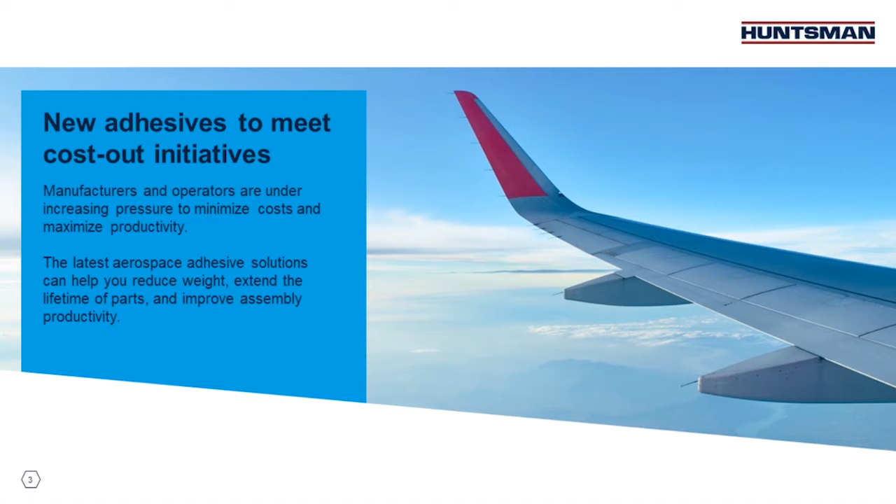If you think about your current situation, you may be either looking to improve performance in a new design you're working on, or you're under existing contracts with fixed pricing and deliverables, and the best way to increase your profit is by driving costs from your production process. The aerospace adhesives we're going to be discussing today can help you to reduce these overall cost goals. We can also improve your productivity goals by improving efficiency and throughput, and also by helping to simplify your materials inventory, all while helping reduce aircraft weight and extend part lifetimes.

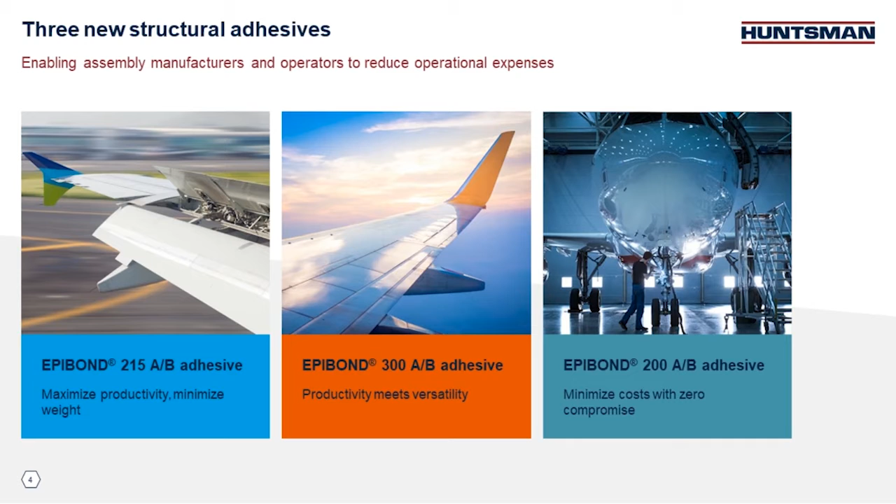We'll be discussing 3 new structural adhesives from Huntsman to help these aerospace engineers and supply chain teams to meet their challenging cost reduction demands. Our Epibond 215, Epibond 300, and Epibond 200 are easier to use and offer faster handling and curing times than many currently offered products.

So what do we do at Huntsman Advanced Materials? Well, we make things possible. Huntsman Advanced Materials serves many of the world's leading businesses across countless industries. We enable greater innovation, performance, and sustainability to engineering challenges on a global basis while contributing towards a better quality of life.

We focus on specialty resins and formulated systems, including epoxy resins, multifunctional components, adhesives, and core reinforcing materials. One of the things that makes Huntsman unique in this industry is that we actually synthesize our very own base components and building blocks as well, versus having to seek these out from other suppliers.

Huntsman's Aerospace Legacy dates back well over 70 years to when one of our earliest adhesives was used in the fabrication of the de Havilland Mosquito, better known as the Wooden Wonder to many of you. It was powered by 2 Rolls-Royce Merlin engines. Its innovative design made it the fastest operational aircraft in the sky in 1941. The Mosquito served successfully in both bomber and fighter roles during World War II.

From this great aviation legacy, our current aerospace brands include Araldite, Epibond, Epocast, and Uralane. Our products are used on almost every major flying platform today. We're specified by manufacturers producing commercial airliners, general aviation, military aircraft, and spacecraft throughout the world, and we're qualified to well over 100 various OEM specifications.

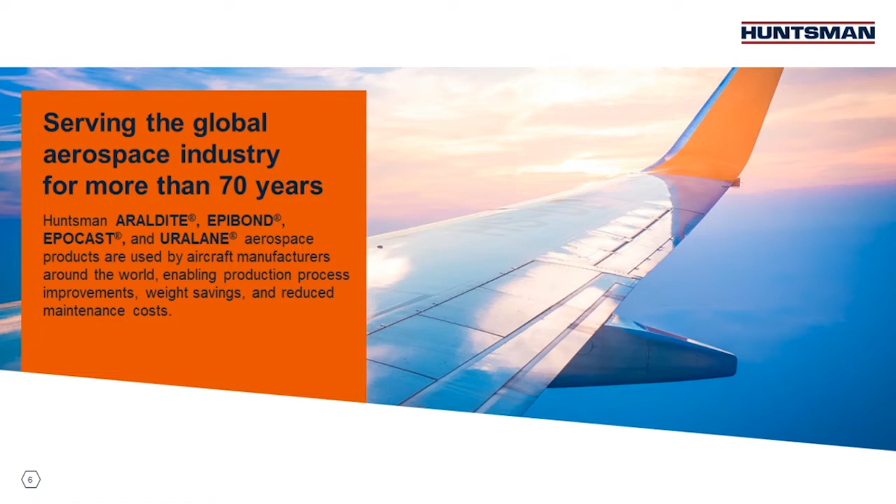In case you're not completely familiar with Huntsman Advanced Materials, I'd like to share with you that we operate production and technology facilities in the Americas, Asia, and Europe. As a global manufacturing leader, our sites are focused on quality, efficiency, and especially safety. They range from smaller facilities designed for specialty production to world-scale production plants, ensuring supply to customers with global requirements.

Our capabilities in high-performance adhesives and composites are made possible by more than 1,600 associates worldwide who help support our over 2,000 global customers with innovative, tailor-made solutions and more than 1,500 pioneering epoxy, acrylic, phenolic, and polyurethane-based polymer products. Now, as we start to review what these new adhesives offer, I encourage you to think about your current and future designs, your current production processes, and the challenges that you're being tasked with by your management.

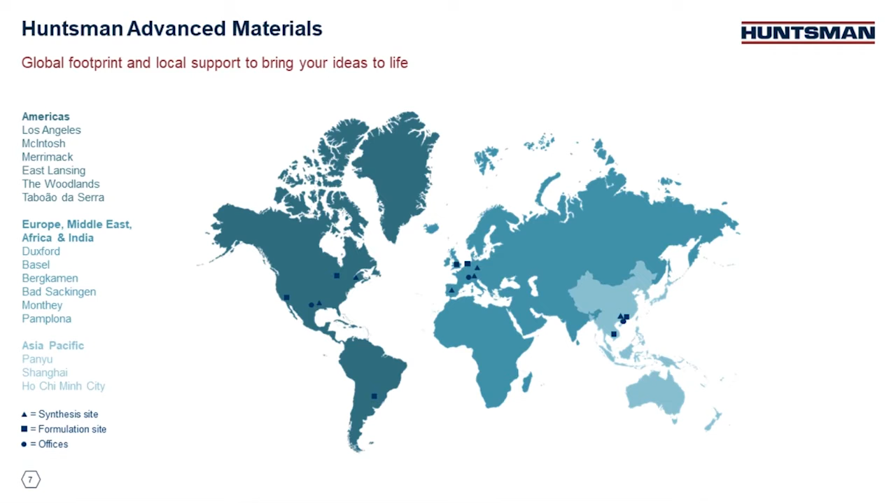We want to help you achieve your company's goals and to break up the status quo, so to speak. So as you think about how we may be able to help you improve these challenges over the next few minutes, please take a moment, make a few notes, and if you're comfortable reaching out to ask some questions during today's discussion, we encourage you to do so, or you're certainly welcome to drop us an email once this is over.

Now what you've been waiting for, our first adhesive. The newest addition to our aerospace adhesives family is already under qualification by two of our customers. Epibond 215 is the first structural adhesive we're going to discuss today. Thanks to its overall mechanical performance, Epibond 215 has up to 45% better peel, shear, and compressive strength than many of the competitors in the same class of adhesive.

Thanks to these features, Epibond 215 can actually replace up to 5 competitive adhesives and is approximately 75% lighter weight than the traditional mechanical fasteners that you may be currently using. What all this means is that you may be able to reduce your inventory SKUs by up to 80%.

So if you think about the advantages of these adhesives over mechanical fasteners, they're not only lighter weight, there's no drilling of holes, which greatly helps reduce potential for points of corrosion, and especially the really horrid headache of misdrilled holes. All this means greater corrosion resistance, lighter weight, and improved production and inventory efficiencies. Now I'll turn it over to Leah Yaterius for a more technical look at our Epibond 215.

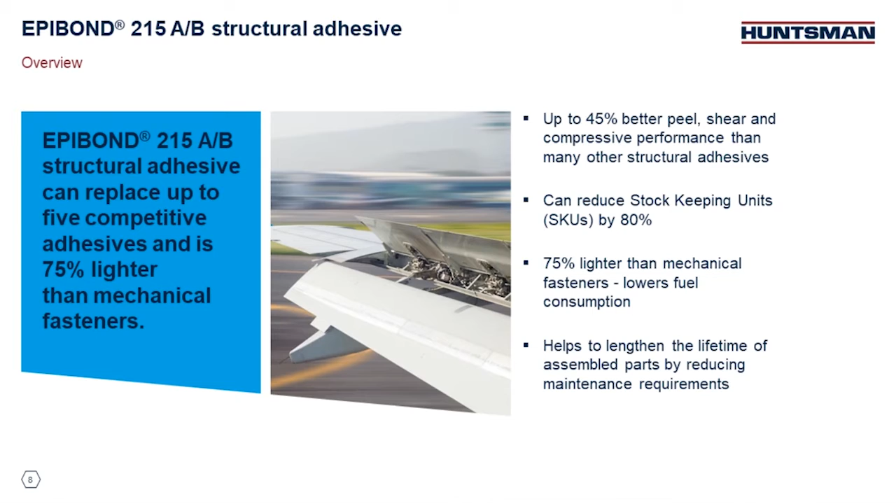Thanks, Todd. Epibond 215 is ideal for bonding multiple substrates, including metals, composites, and most thermoplastics. What you see here on the left is an overview of the performance data. The primary feature of Epibond 215 is its exceptional peel strength. At room temperature, it gets 85 pli for roller peel and 71 pli for T-peel.

Now, typically, adhesives with high peel will suffer from reduced lap shear strength, especially at elevated temperatures. But for Epibond 215, while it has high peel, it also has exceptional lap shear strength at room temperature, as you can see, 5,200 psi. It also has a wide service temp range from -90°F to 250°F. At 250°F, the lap shear strength is 2,000 psi.

While most epoxy adhesives have a decline in performance at extremely low temperatures due to embrittlement, the lap shear strength actually improves to 5,500 psi at -90°F. Combined with its low outgassing, this product is well suited for space applications. It also maintains a good compressive strength of 7,400 psi at room temperature. And as a side note, you can contact us and request any additional data that is not shown in this presentation.

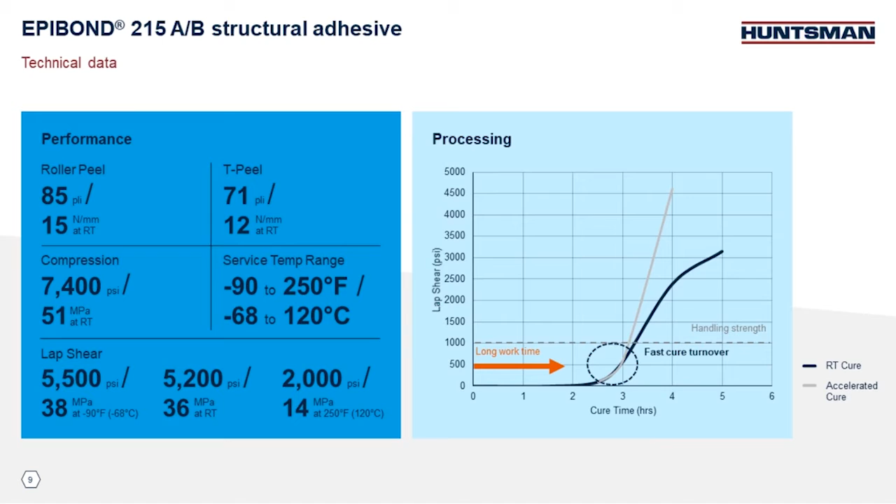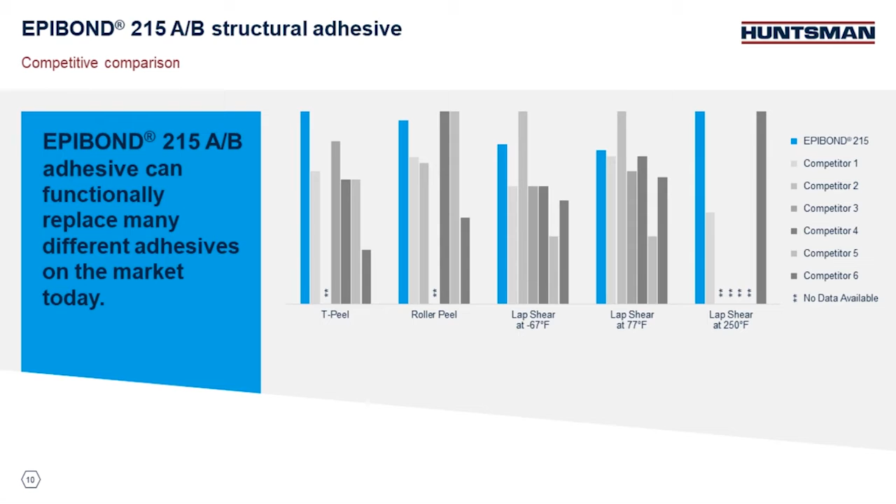Now, how can it improve productivity? Well, the time to handling strength for several of these competitor products is 12 to 24 hours. Epibond 215 reaches handling strength in 3 hours. So, unlike the competition, Epibond 215 will allow the part to be moved in one shift. In summary, you can have high peel, high lap shear strength, wide service temp, and improved production throughput in one product that can potentially replace several competitor products. Next slide.

All right, thanks, Lee. Suitable applications you may want to consider EpiBond 215 for include the bonding of not only simple fixtures, brackets, mounting posts, inserts, and nut plates, but all the way up to major airframe components such as your spars, ribs, stringers, and even flight control surfaces. Thanks to the low outgassing that Lee pointed out, it's also a great option to consider for space applications, including component and insert bonding.

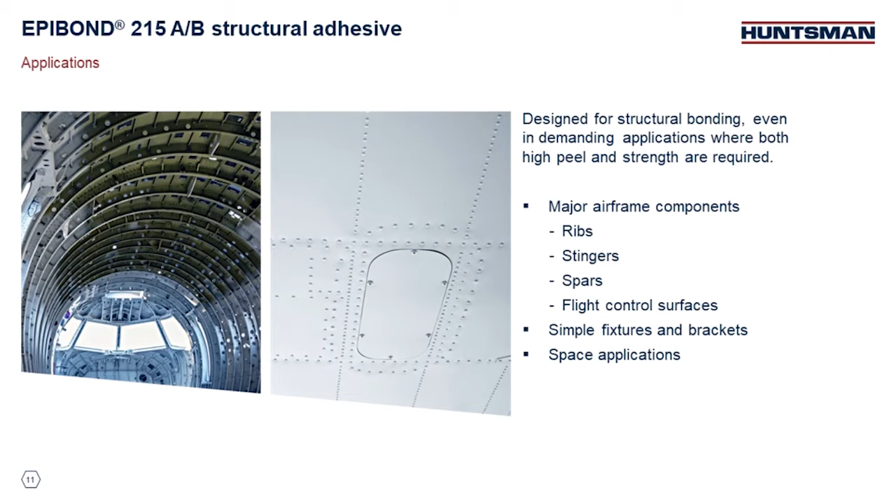When we formulated EpiBond 215, it was based on extensive customer feedback. As a result, it's capable of replacing up to 5 adhesives in the same class that are on the market today. When you're thinking about your operation, be sure to keep in mind that when multiple adhesives are used in the same assembly, both production time and inventory complexities can grow significantly, along with product application, EHS, and training requirements. So why make operations more complicated than they need to be? Straightforward, EpiBond 215 is a high-performance structural adhesive with exceptional peel strength and shear strength across a wide variety of temperatures.

Next up, one of my also favorite adhesives, EpiBond 300. EpiBond 300 is a very versatile and impressive structural adhesive, and it can actually improve your production throughput by up to 80%. EpiBond 300 features an up to 80% quicker time to handling strength and even an 88% faster cure time. What this means is that depending on the size of your application and your part assembly, your operations could be completed and moved within a single shift and a fully cured part produced within 1 day.

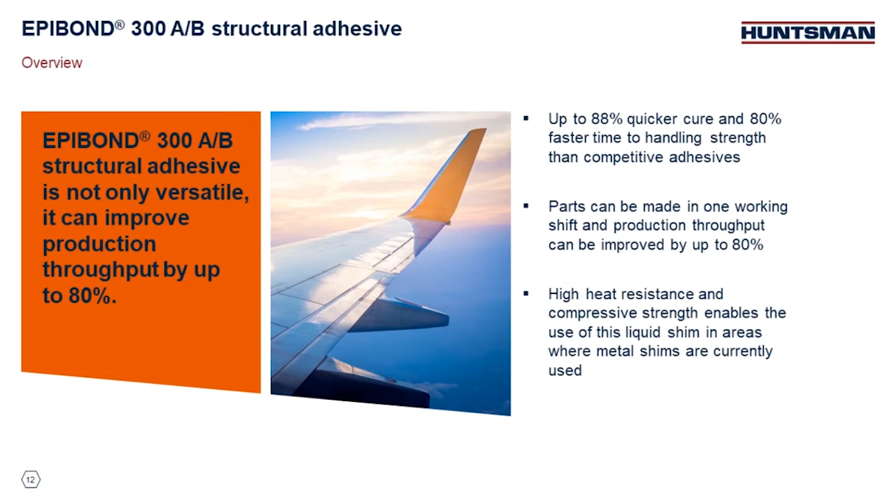EpiBond 300 offers high compressive strength along with high service temperature. This makes it a very suitable candidate for use in liquid shim applications where you may currently use metal shims. With EpiBond 300's high elevated temperature performance, improved handling and flexible cure times and cycles, it's better than many products currently in the market today. So be sure to note the differences that Lee is going to point out to you about how this material handles, its compressive strength compared to older products on the market, and also its impressive peel strength. So Lee, if you could share some technical information with us.

EpiBond 300 is ideal for high volume production for applications requiring high strength at elevated temperatures. The primary feature is exceptional mechanical properties and strength retention of those properties at high temperatures. On the left, we're showing compressive strength and lap shear strength values at room temperature and elevated temperatures. It's very strong in compression, giving 11,000 psi at room temperature and 9,000 psi at 250 F. Another additional benefit is the compressive failure mode. I've personally observed that EpiBond 300 will not shatter when it fails, unlike the competitor product.

For lap shear strength, it gives 4,200 psi at room temperature, 3,100 psi at 250 F, and it retains 1,100 psi at 400 F. That is outstanding adhesive performance. EpiBond 300 also cures at room temperature. If you look at the right side, you can see that the handling time at room temperature is slightly over 4 hours, which enables completion of assembly within one shift. And, as indicated by the circle, it will achieve 85% cure in only 6.5 hours. If you want to speed things up, 1 hour at 150 F will give a full cure.

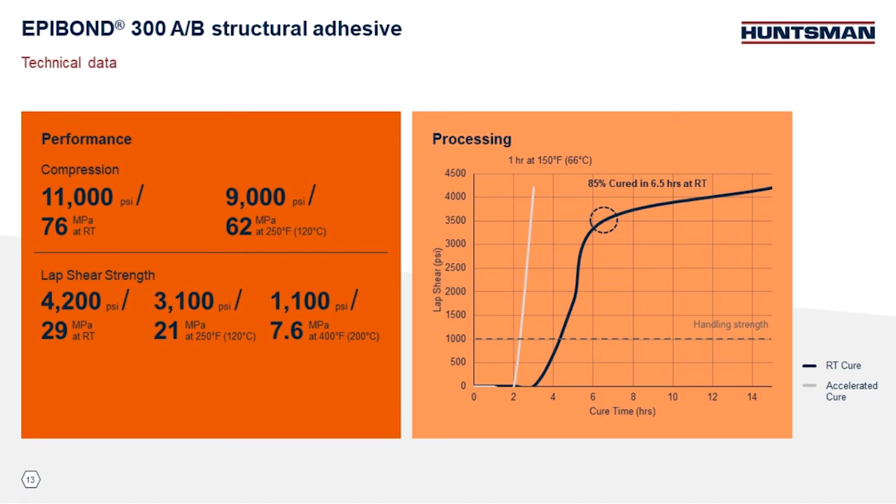EpiBond 300 is available in dual barrel cartridges and pail kits. For this class of adhesive, some competitors are only available in injection kits. This allows for versatility in application by cartridge, hand mixing, or meter mix dispensing. Next slide, please.

What we're showing on the top is EpiBond 300 compared to the leading competitive liquid shim adhesive for aerospace applications. These applications are sized by compression and lap shear strength and high temperature performance. Lap shear and compressive strength at room temperature are similar to the competitor, but at elevated temperatures, as you can see, this product far outperforms the competitor. At 400 F, the lap shear strength is significantly higher, doubling that of the competitor. The compressive strength is also significantly higher at 250 F, again, almost doubling that of the competitor. The T-peel for EpiBond 300 is 3 times that of the competitor. So, when comparing performance across all characteristics, especially at high temperatures, EpiBond 300 is not only a superior liquid shim, but an outstanding structural adhesive.

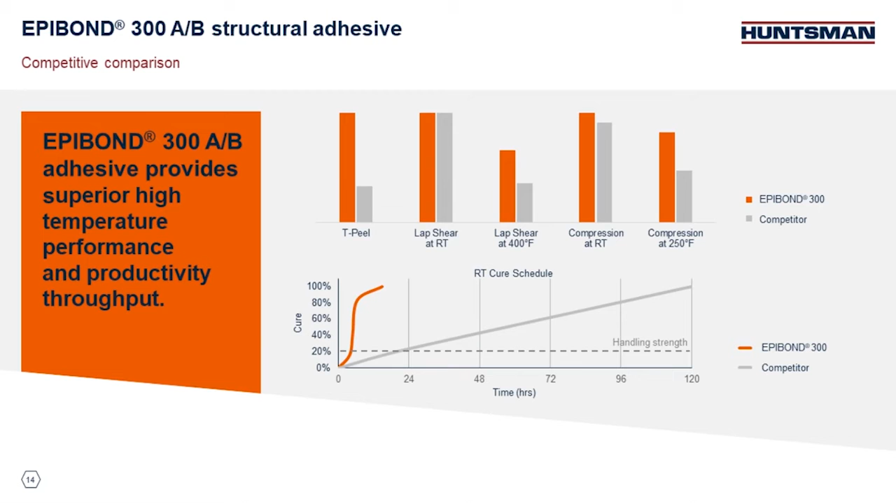Compared to the competitor, you can also achieve a significant cost reduction using EpiBond 300 due to its processing characteristics. You can see on the bottom half of the slide, EpiBond 300 reaches handling strength in 4 hours at room temperature, whereas the competitor will take 24 hours. Yet, in under 24 hours at room temperature, EpiBond 300 will achieve full strength. The competitor will take up to 5 days. So, in addition to high performance, this product offers increased productivity. Next slide.

Thank you, Lee. So as Lee just pointed out, the 300 is well designed for a variety of demanding applications where an adhesive or liquid shim may be needed. This is anything from skin to structure, engine nacelles, and other environments requiring a high service temperature product. EpiBond 300 is a smart choice for your consideration.

Along with the unique compressive characteristics, it has excellent compressive and shear strengths, offers a much greater peel strength than other options on the market, and to keep your team in the shop happy, we're talking about the people who actually have to mix and handle it and apply it. The 300 has a much more user-friendly mix ratio and a more similar resin and hardener viscosity, as well as flexible curing options. This similarity in viscosity really helps to improve safety concerns when you're mixing it, as it reduces the potential for splash to the user.

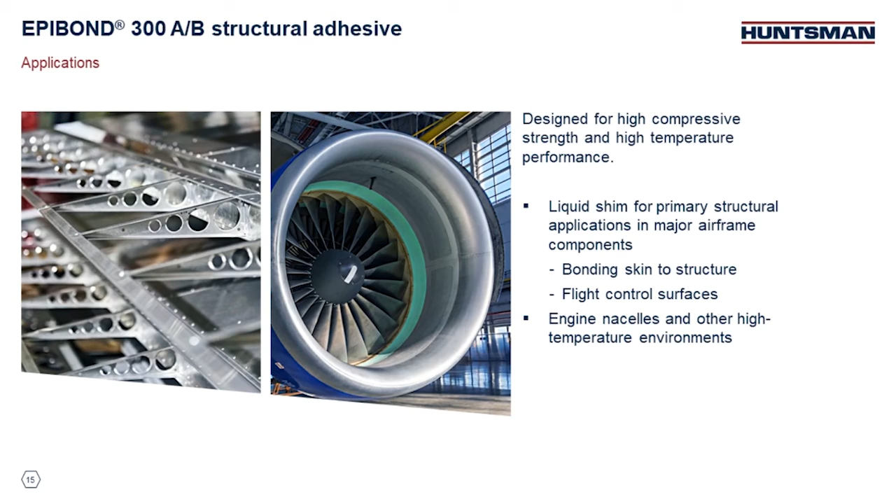Next up, one of my absolute favorite adhesives that we're introducing. It's EpiBond 200. EpiBond 200's structural adhesive's faster time to handling strength can increase your throughput by up to 50%. This could allow your parts to be completed in one shift. It's very flexible, it's very tough, yet offers high shear and good performance across a wide temperature range. One of the many things I like about the very versatile EpiBond 200 is how well it flows and wets out. Yet it's also non-sag, which allows it to be applied vertically or overhead.

So if you think about your shop, this means that the shop wouldn't have to rotate the tooling jig or the part during production. Adding to the list of things that make me like EpiBond 200 so much is the simplistic mix ratio. It's very straightforward, either 1-to-1 by weight or volume. Again, this speaks to its shop-friendly handling characteristics. Also, in areas where the bond line may be exposed to dust or FOD in the shop, the faster tack-free time reduces the potential for contamination. So back to Lee one more time for a technical review of EpiBond 200.

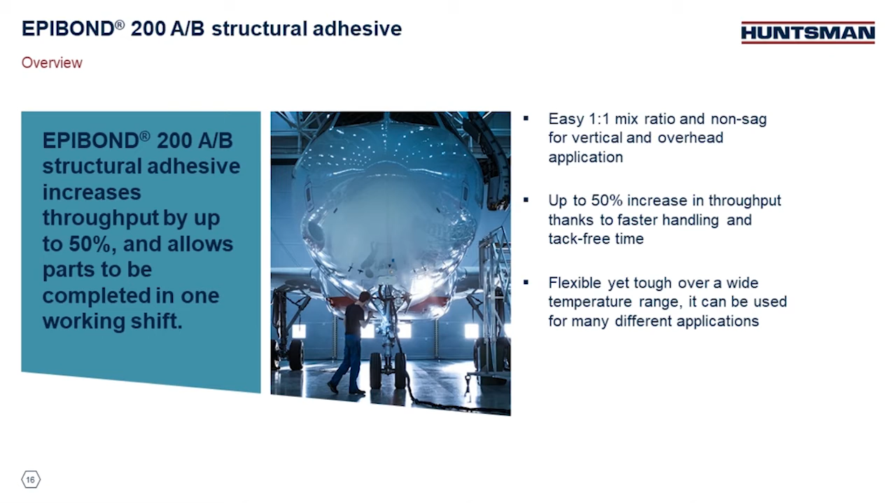Thanks, Todd. As he said, EpiBond 200 is ideal for aerospace structural bonding requiring vertical or overhead product application due to its non-sag rheology. An overview of performance data is on the left. Its primary feature is excellent mechanical performance at elevated temperatures while remaining flexible and tough. At room temperature, the lap shear strength is 3,200 psi, and at 200 F, a little over 1,000 psi. EpiBond 200 gives good performance at low temperatures as well. Typical competitive products either become too brittle or do not have good strength retention at lower temperatures. But EpiBond 200 has a lap shear strength of over 3,100 psi at negative 67 F.

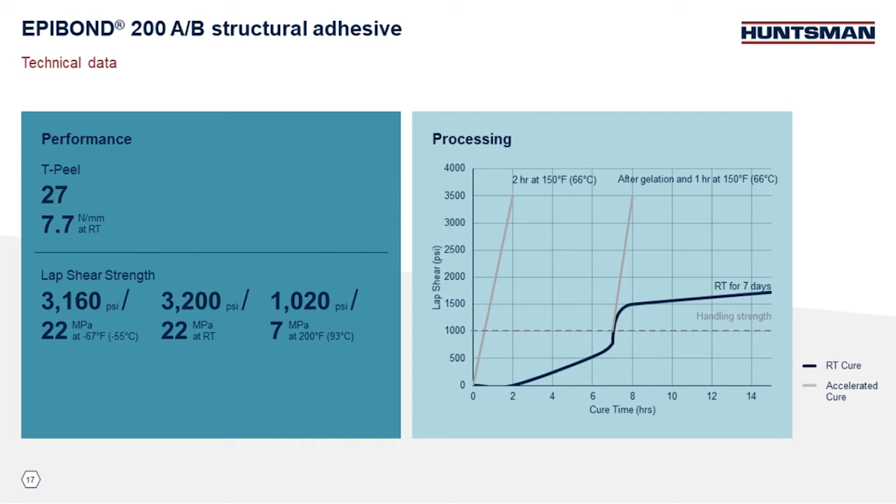So as far as processing goes, it's easy to mix and dispense and has a 60 to 70 minute working time. It will be FOD tack-free in 5 to 8 hours at room temperature and reaches handling strength in 6 to 8 hours at room temperature. It will be fully cured in 7 days at room temperature, or it can be accelerated for 2 hours at 150 F after application, or only 1 hour at 150 F after it reaches handling strength. Next slide, please.

What we're showing here is EpiBond 200 compared to the leading competitive flexible adhesive used primarily as an edge sealer. This is primarily prized for toughness and high temperature performance. It has excellent mechanical strength compared to the competition, especially at elevated temperatures. Here you can see that while the T-peel and lap shear strength at room temperature is similar, you can get about 150% improvement in strength retention at elevated temperatures. You can also achieve a significant cost reduction using EpiBond 200 due to its processing characteristics.

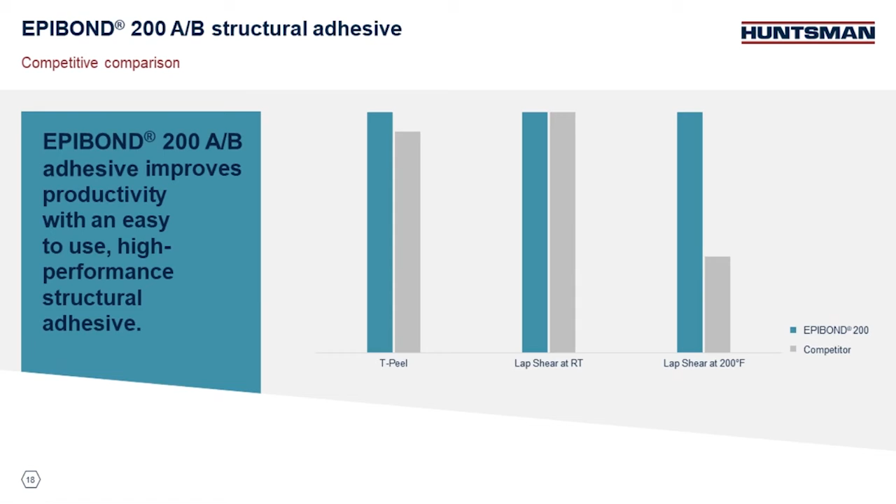EpiBond 200 reaches handling strength in 6 to 8 hours, whereas the competitor time to handling strength is 8 to 12 hours. This means that you can get a 30 to 50% increase in production throughput. EpiBond 200 will allow you to complete an assembly operation within a single shift. Back to you, Todd. Thanks, Lee. I appreciate the excellent insight.

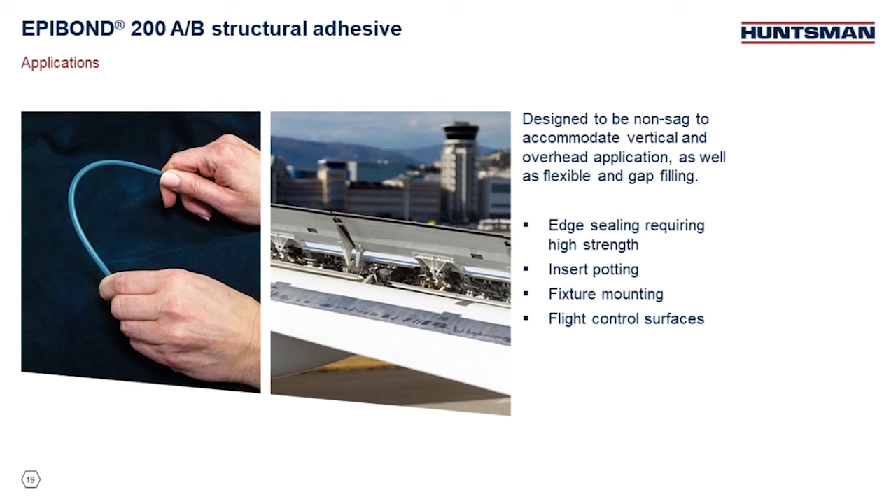As you can see from what Lee pointed out, EpiBond 200 is certainly a good candidate for a very broad range of applications such as fixture mounting, insert potting, nut plate, and component bonding, and also for high fatigue applications and even edge sealing of areas such as CFRP and other composite materials where you may want greater strength and durability beyond what simple sealants may offer. EpiBond 200 is a very versatile, flexible, and high-performance structural adhesive to consider. It's going to help you improve productivity. It's non-sag. Its elevated temperature performance and improved cure schedule are all user-friendly and design-friendly attributes. So, in summary, Huntsman's EpiBond structural adhesive line offers improved performance across a wide variety of demanding ranges in the aerospace applications.

The 3 products we presented today will help the aerospace supply chain meet the demanding and challenging cost reduction that we're faced with in our industry. Our easier to use, faster curing products enable our aerospace customers to reduce their overall production cost and improve productivity and throughput. EpiBond 215 is a high-performance structural adhesive designed for high peel and shear applications like primary structural bonding. It can also replace many currently competitive products and replace the use of mechanical fasteners as well.

EpiBond 300, with its exceptional compressive performance and strength at higher temperatures, is ideally suited for applications such as liquid shim and other structural adhesive applications, while also providing significant improvements in your productivity and your throughput. Finally, EpiBond 200 enables easier application and improved throughput for a variety of applications. Its excellent mechanical performance, flexibility, and toughness make it ideal for fixture mounting, insert potting, edge sealing, and other demanding structural applications with vibration and repetitive loads, such as flight control surfaces.

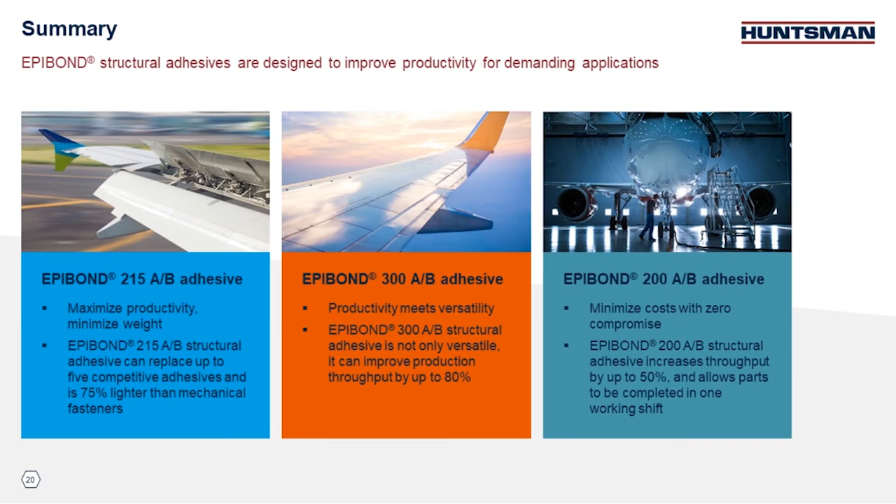So as we share this information with you today, I hope you thought about some of the specifics of your unique application, your needs, your wants, your concerns, and your future plans. Please reach out to us if you think we can help, or even if you only have a simple question. Remember, we make things possible.

In addition to these products that we just discussed, Huntsman Advanced Materials offers a wide range of void filling and core reinforcing compounds, edge fillers, structural adhesives, and laminating resin systems.